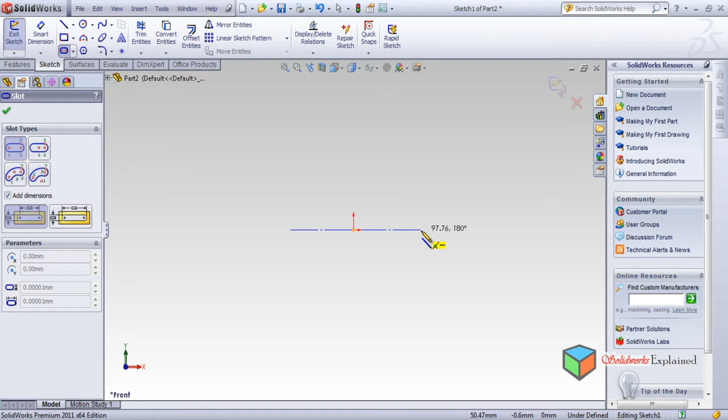Let's start with a new part and start making gears. But before making gears, let's see what I'm doing. Front, normal, sketch, okay, slot, let's say, okay, this big, and here, circle.

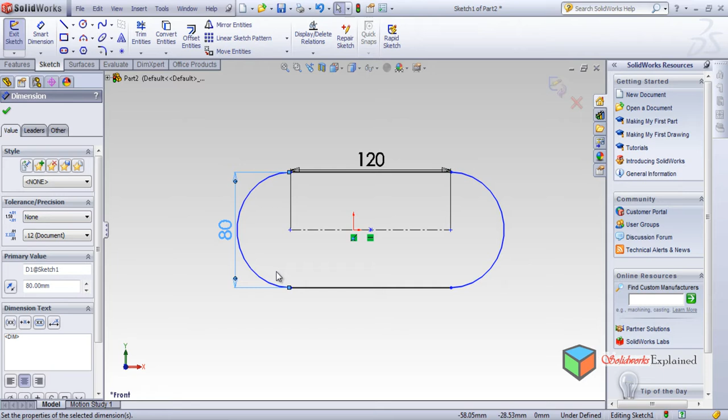How big you want this is important in this case. So for that, how big it should be, I'll make it let's say 100 or more than that, 120, and this I'll make it 80. This distance is 80. Okay, done. Now from here...

Make a circle of radius 20. This 50, no, I don't want 50, I want 20. Okay, we have made a circle with 20. Again the same thing, I'll make it 20. Okay, this is done. Features, extrude 10, okay, or say 20. Okay.

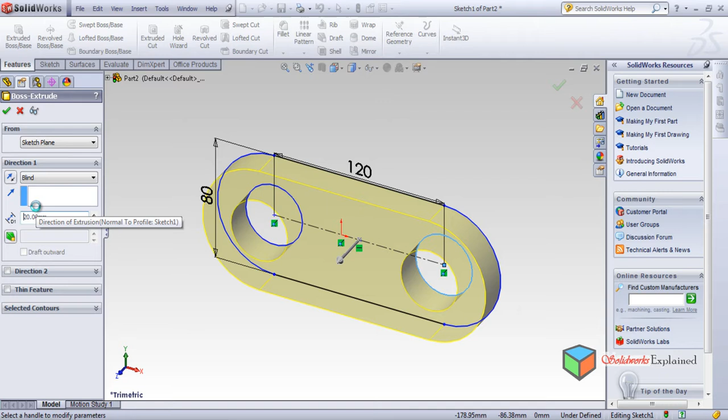This is done. Now what I'll be doing is I will save this part because we'll need this part later. So file, save as, I will make a new folder over here and new folder name will be gear mate. Okay, and the part name of this, let's say, it's a kind of holder.

Save. Now here I will make a rod. There will be a rod, on that rod the gear will be mounted. So I will now make a rod. So close this thing, again make a new part. That was 20, so I need to make a rod.

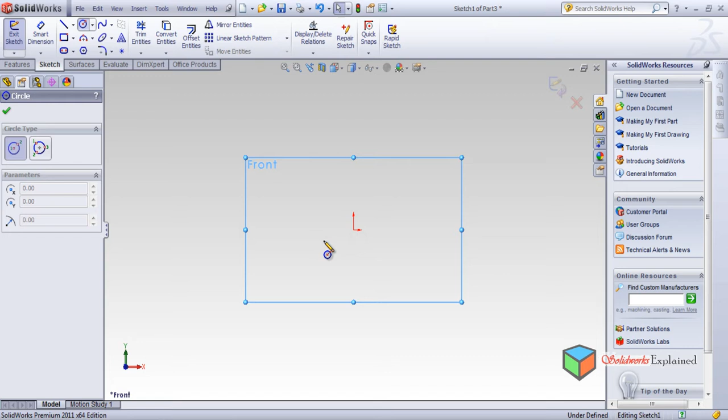But yes, I'll make a rod of 20. So this circle will be of 20, and then features, extrude, will make it not 10, 100 or more than 100, 150. Yes, okay. Now that rod passes to the center of this slot. Yes, definitely it passes to the center of the slot, and what it does is the gear will be mounted. So gear will be mounted somewhere here.

So for that what I need to do is make a plane. This was made in front plane, so I'll go to reference geometry, plane. I have shown you all these things, so I will make this thing quickly, and it will be where you want the plane, where you want the gear. I want my gear somewhere here. Okay, and in this plane make it normal, and I will start a sketch on this.

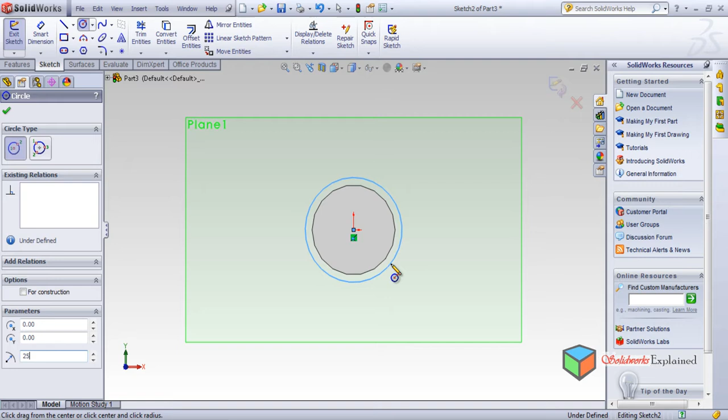Okay, and the sketch will be, say, circle. This was 20, so let's say this will be 25, not very big. Okay, and then I want a center line.

Okay, escape, and then I'll make a key slot, a small key slot, zoom in somewhere here very randomly. Oh, it went somewhere else. Close, line, zoom in. Yes, like this, like this. Escape.

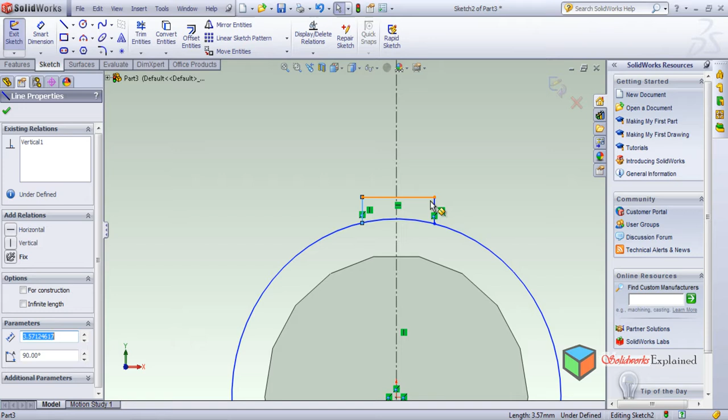Now click here, add relation, make it equal. Okay, this is equal now. Yes, and then smart dimensions, we'll give some dimension 3.5, let's say we'll give it 2. 2 is a bit small, but that's okay, we'll give it 3.

And this dimension is 10. Okay, if this is 10, I don't want it 10 actually, I want it 7 or 6, this much. This is 6 and make it 2 actually, 6 and 2, this will work. Okay, now we'll go to option, sketch, edit, and then trim. We'll trim this thing. If you understand what is this.

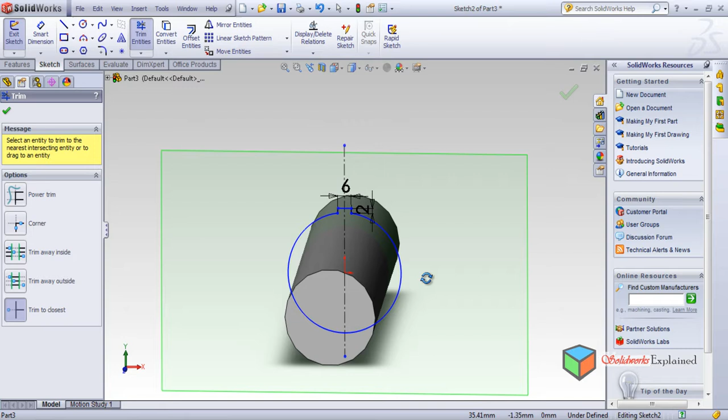Now features, no, not 150, just 20. 20 is more than enough actually. 20, or say just 15. 10 also works. Okay, fine, my rod is ready.

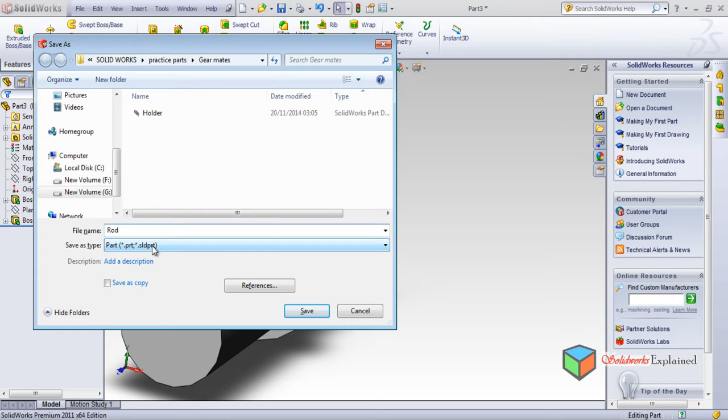Plane, I will hide it. Okay, I'll save this part again, Control S, and then this will be my rod. Save. Okay, I have made the rod.

Now this is the key slot. On this thing my gear will be mounted. So this is 25. I'll close this thing, and again I will open a new part, and I will quickly start making a gear, a simple gear, not very complicated and not using the engineering techniques. Here, circle, and this will be 25.

Okay, if this is 25, then the main gear will be one more circle. This will be, let's say, 80 radius. Yeah, 80 radius. Okay, now we'll make some feature, but before making a feature I want to make

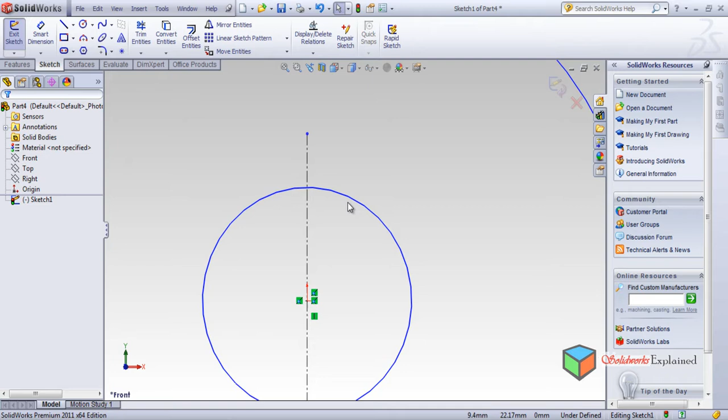a keyhole over here, which fits in that part. So for that again I need a center line. This is the center line, escape, then line, and with this line again same what we did earlier, I'll repeat it like this. If you remember what was the size, this and this should be equal. Okay, and this was, if you remember, 4, and this was, if you remember, 2.

Yeah, and trim. So what is going to happen is that rod will fit over here. Okay, and then features, and then this is a gear, so extrude gear, I want it 20, this big.

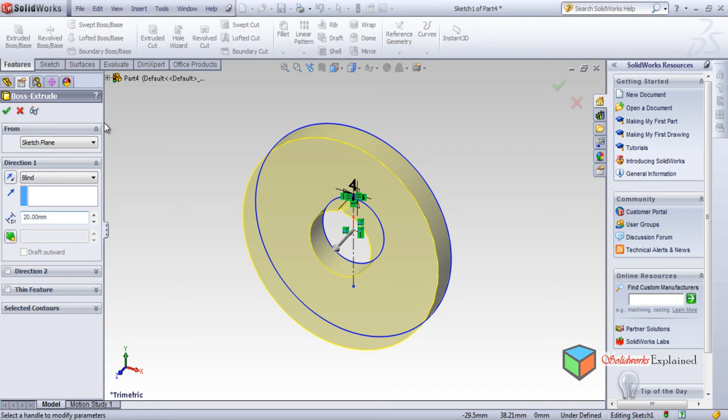Okay, now this thing is done. Now what we'll do is we'll make it normal, and here on this face we'll start making another sketch over here somewhere, and the sketch can be like this. We'll close this profile, and then features, extrude cut.

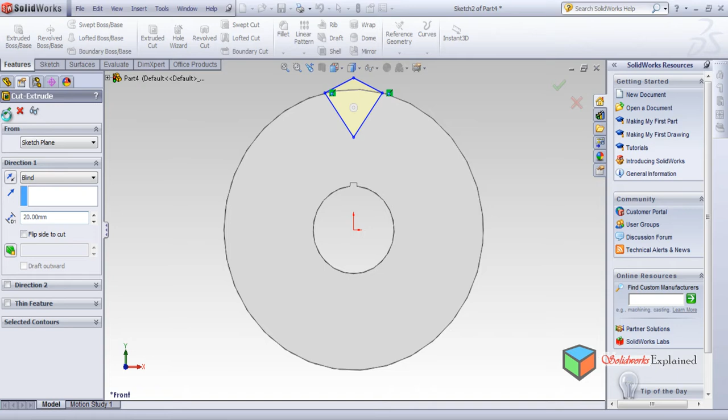Okay, this thing goes off and this thing goes off. What we'll do is we'll start making a circular pattern, and this is this thing. Look, 15 degrees.

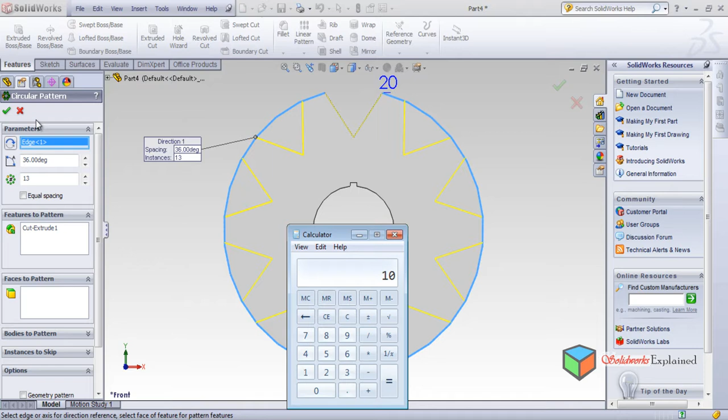I don't want 15. Let's say I want 30 degrees or 36 degrees. If you remember the calculations, 360 divided by degrees, so 36 will be 10, so only 10 will be accommodated here in 36 degrees, so we'll make it 10. But is it okay? Yes, it looks okay with 10. The gear, make it okay.

Cut extrude. Yes, my gear is ready with the key slot. So here I will save the gear, Control S. This is okay. I will make the name of the gear spur gear. This is a bigger gear, spur. Save. Now close this thing.

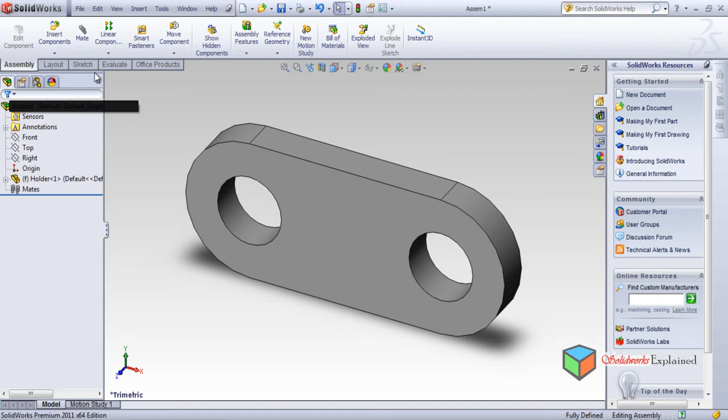Now quickly I'll start with the assembly, so in order to understand how you are working, to make this parts assemble together, go to assembly. Okay, and then what to do? Browse. First thing is the holder. Open. Yes, somewhere here. Again, insert components and browse.

The rod. Open. It should go here somewhere, so we'll keep it here. And then what I'll be doing is, now both the parts can move, but what I'll do is click here, or let's say I want to view some temporary axis. View temporary axis. Okay, this axis mate with this axis. Look, and this is in line.

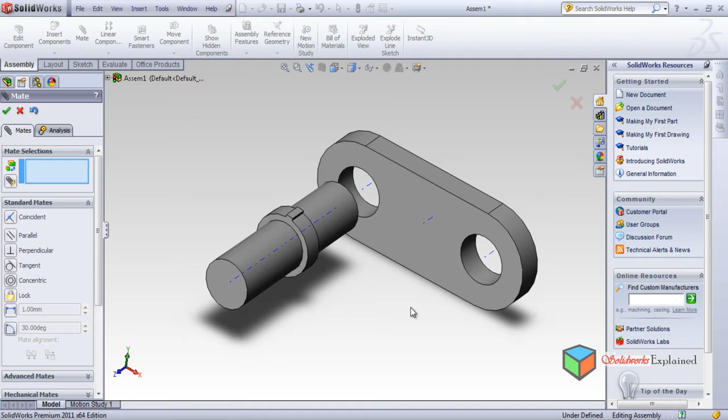Okay, so now coincident. Okay, now look, this is moving like this, but it is not moving anywhere. Okay, again I will teach you the assembly now. So the thing is, this part is moving like this, plus this part is also, look, the key like this, it is moving. So it is having 2 degrees of freedom. One will be X and Y, other will be the rotation.

So now here what I need to do is, not this face, I will select this face and this face, 2 faces, mates, coincident. Okay, now let's see what will happen is, now after making coincident, look, it is having only 1 degree of freedom like this. It is not moving anywhere else. Okay, so this thing is a perfect thing.

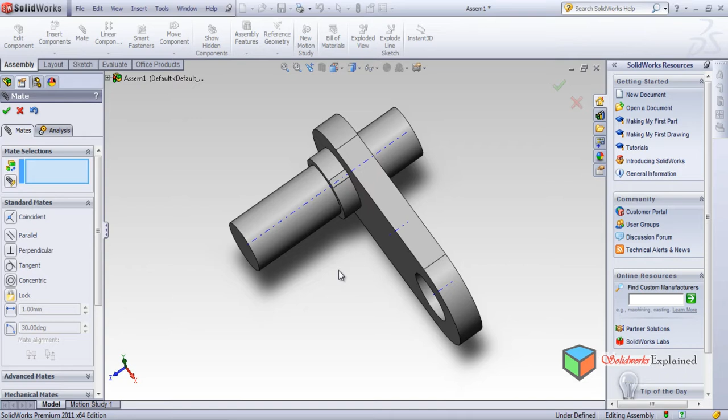And for this thing, I'll close this thing, and what I will do is insert components, browse, and spur gear, double click. Look, I want to make spur gear over here somewhere. Click like this, and then what I need to do is, again I need to do this, I have selected this axis of spur gear, mate with this axis. Okay, now these are coincident. Okay, now I can move this thing, and I can move like this also, anywhere.

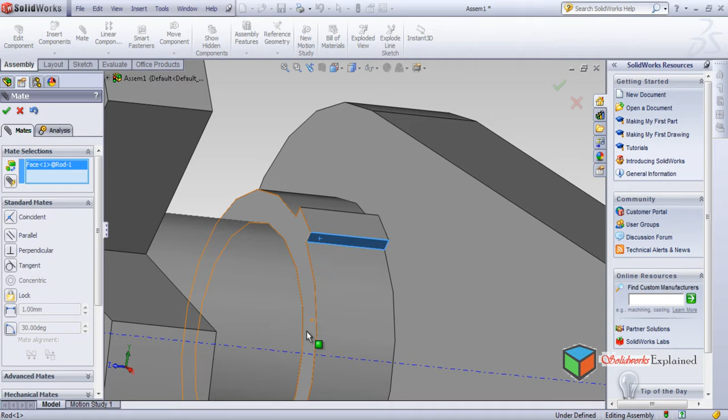So what I'll be doing is, what face should I select to make it coincident one more time? I will select the side face like this, side face, first face, and side face of this. Okay, mate can be created. It shows the mate can't be created. Even if I do okay, please select a mate type. Oh, it shows the type.

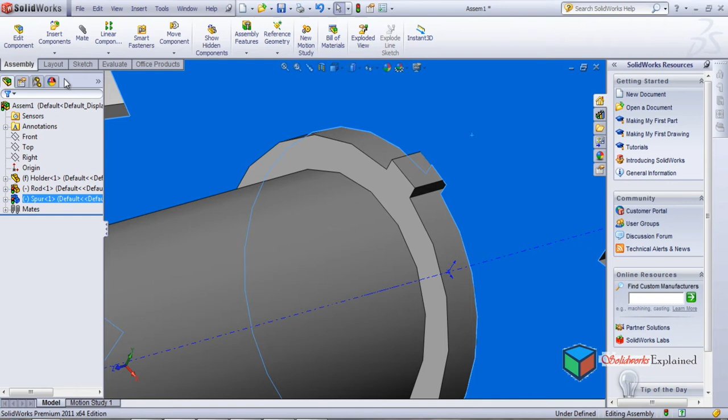Look, the key slot, the size, are the size same? Close this thing, just move inside. Look at this, this size, look, this seems to be a bit smaller. The key slot is much bigger. So where's the problem? The problem is with the gear. This slot is a bit smaller, I guess, or else this is big. We'll see the dimensions, the smart dimensions. This is 6, look, and this, okay, this is 6.

Cancel, delete. And how much is this? This is 4. We wanted 4, but this is 6. So in this case, this rod should be made new.

So what we do is, we'll open this rod. Yes, now this rod is open in a new window. What we do is, go to sketch, make it normal, and then edit sketch.

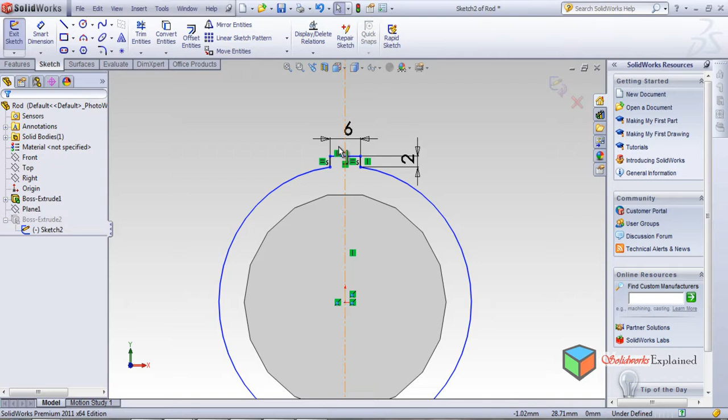Look, why is this 6? This created a problem, this should be 4. Exit sketch when this is made, isometric view, we'll save it. Control S.

Is done. Now we'll go back to our assembly. This is our assembly here. Yes, make it yes. Okay, now we'll move and see. Yes, it seems to be alright.

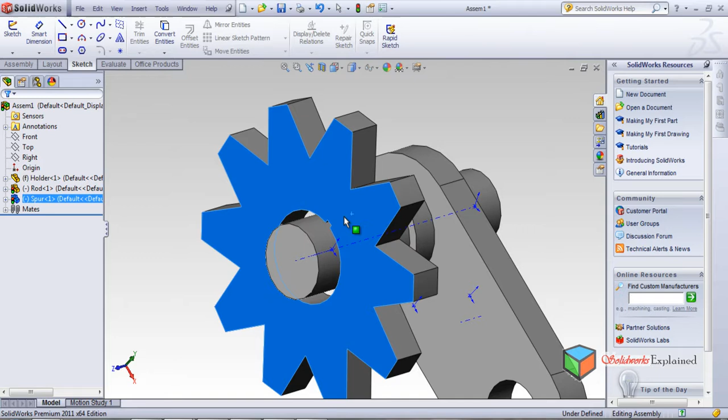Now we'll see whether this is moving. Yes, this is moving, and this is also moving. Okay, this is perfect. Now in this case, what we need to do is again the same thing.

Select this edge, and this should mate with what? Mate with this edge. Okay.

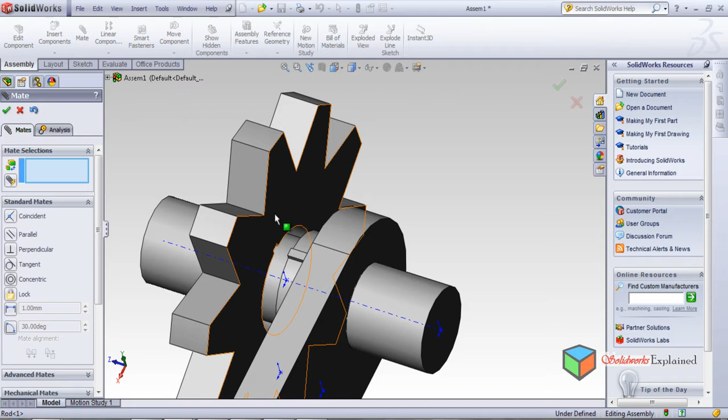Zoom in. Coincident, yes. Now look, when this moves, this also moves, but again still this movement is not restricted. So to restrict this particular movement, what we need to do is click here, mate with this surface. Okay, coincident, yes. Now see what happens, look, this moves.

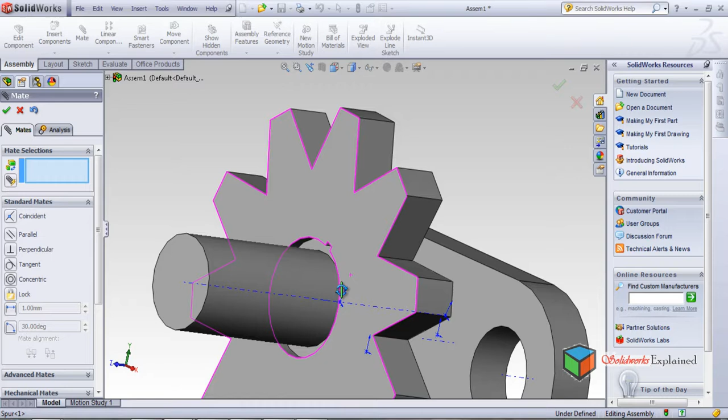We'll zoom it, this also moves. What we find is the thickness of the spur gear is a bit higher than the slot on the rod. So what you can see is, like, look, this is very high thickness.

So I think I need to reduce this thickness. For that I need to measure this rod thickness. How much is this thickness? So this is the boss extrude edit feature, and it was made 15.

Close this thing. We'll open the gear, spur gear, and let's see, cut extrude, boss extrude. This is the boss extrude edit feature. This is 20, so we'll make it 15. Okay.

So now this is 15 and we'll save it. Control S. Okay, this is done, and now go back to assembly and we'll make it. This is assembly. Look, it has been automatically updated and now it looks good. It fits properly, it moves properly. So this thing is done.

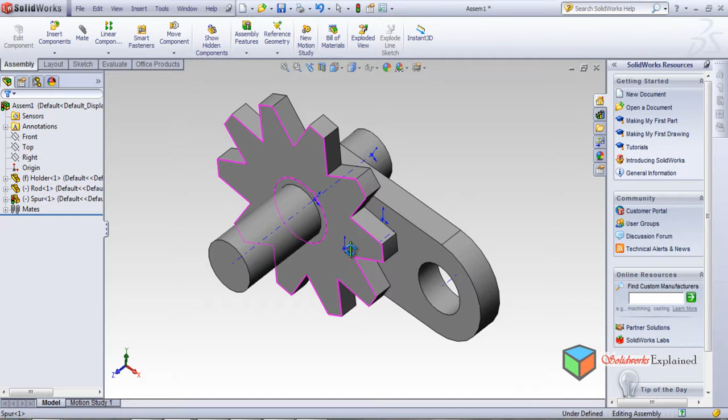So till now many things are done. Now I need a small gear, a small gear which can rotate. I want a rod also here, so I'll insert one more rod.

Insert rod over here. We'll do the same thing. Click here, mate, click here. This thing is done. Now coincident, click here, zoom in a little bit, click here. This is coincident, yes. Zoom out.

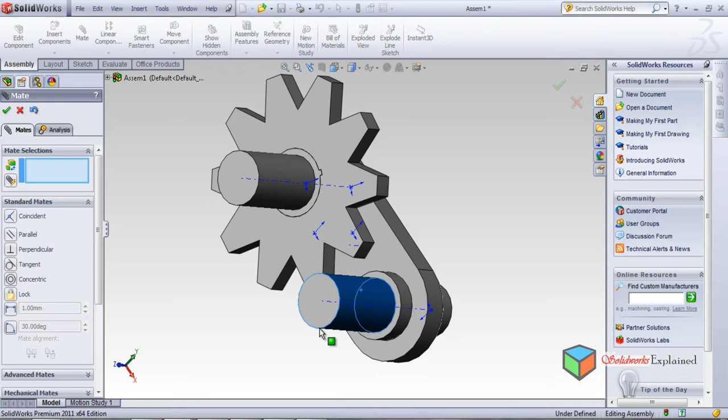Okay, now zoom in a little bit and check. Yes, this moves. This doesn't come out, then this moves. So this is proper. So what we'll do is we'll save this assembly so that we do not lose our data.

File, save as. Okay, and we'll save here as assembly 1. Save. So this thing is being saved now, and I think this is very close, so I think we need to increase the distance between two gears.

Now what I need to do is I want to make one more gear. So for that I'll go back to the earlier gear and let's see whether I can modify this gear or not. Okay, so this is boss extrude and this is the sketch of it.

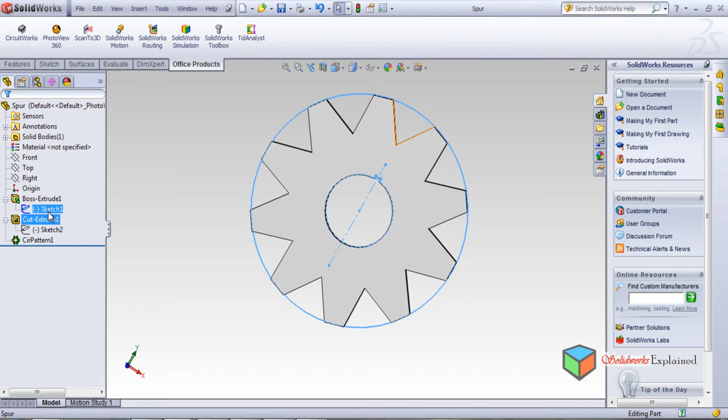This is the sketch and this is a cut extrude. So I think I need to modify the cut extrude because, so let's go to cut extrude sketch, edit sketch. This is a sketch, but I want to reduce the size, anyway I can do that thing.

This is a bit bigger, and this angle is a bit smaller. This is smaller. Let's see, but the problem is, so I want a smaller gear with a smaller diameter, so do it back and look how the shape has been changed.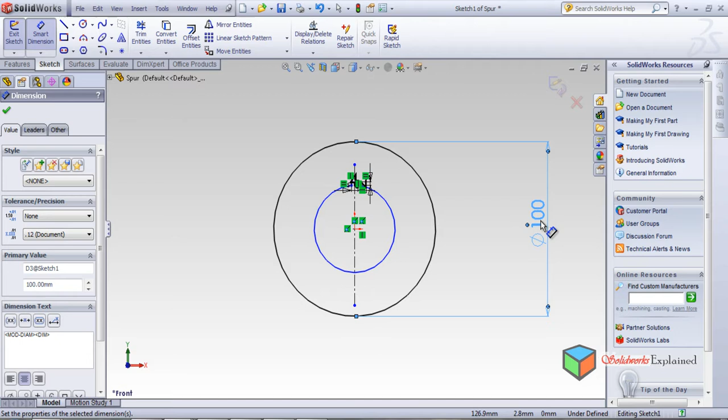But this is the original sketch, so I will go to original sketch. Okay, we'll make it normal, and this with smart dimensions is 160. I don't want it 160, I want it 100 only.

Make it back and see how are the gears. So this boss extrude is proper, and the cut extrude, go to sketch and don't do it like this, make it a little bit bigger and then go back. Look how these things are changing.

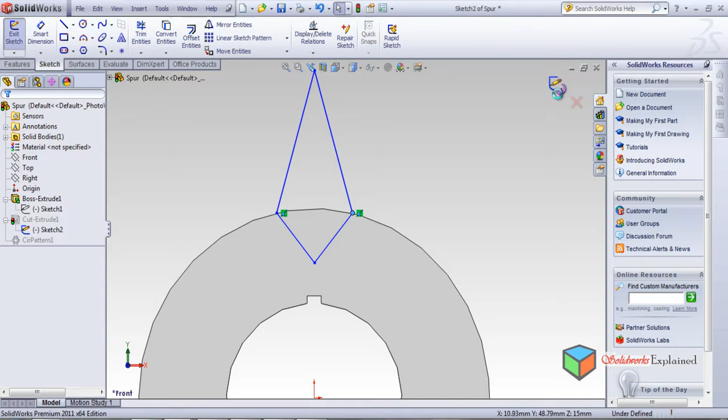Again go to sketch, check what can be done. This can be moved over here, this can be a little bit here, and this is a little bit here, only a little bit like this. Now see how a small gear is made.

So I will save this. And I need to save this file, save as. Okay, and then we'll make it pinion, P-I-N-I-O-N. Save. So the pinion is made.

Now assembly, this is assembly, go to assembly, and here's what I need to do. But in my pinion gear I need to make some modifications because I cannot keep it like this.

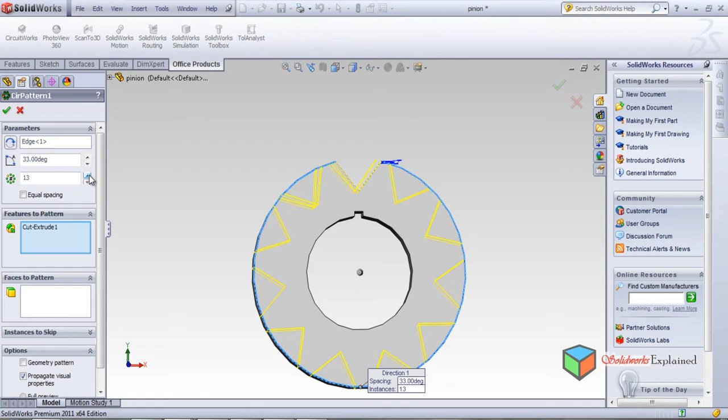So let's see in circular pattern what kind of modifications I can make. With 33 I want it more number, 22, I'll make it less. Look, yes, more number of teeth, can you see?

23, I'll make it 24 teeth. So we'll do the calculation, 360 divided by 24, so I need to make 15 degrees for 24 angle. It should be 15 degrees for 24, but it will cut everything because the gear is very small.

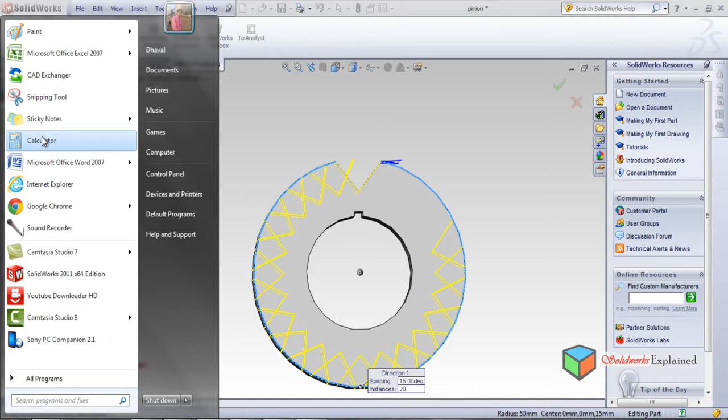So I'll make it, let's say, not 24 but at least 20. So it should be 360 divided by 20, which is 18. So I need to make it 18 numbers, 18 degrees.

Is this okay? Well, I feel this is okay, but let's check. Look, this seems to be fine. So Control S, okay, this saving work is done.

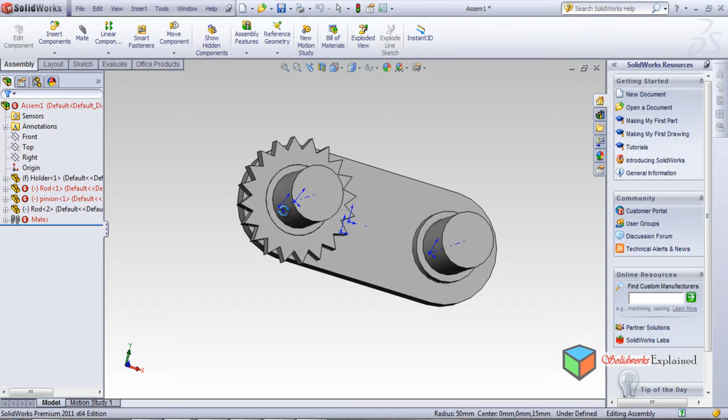Now go to assembly. It shows error. Close. Because the same gear has been modified, that's why it shows error.

So we'll do Control Z. Let's see whether this works. No, go back to the gear. Yes, this is the gear. Now again we'll go to assembly.

So this is how this gear is changing. It has created really a lot of problems. Control Z, Control Z, everything is Control Z over here. Now go back to assembly.

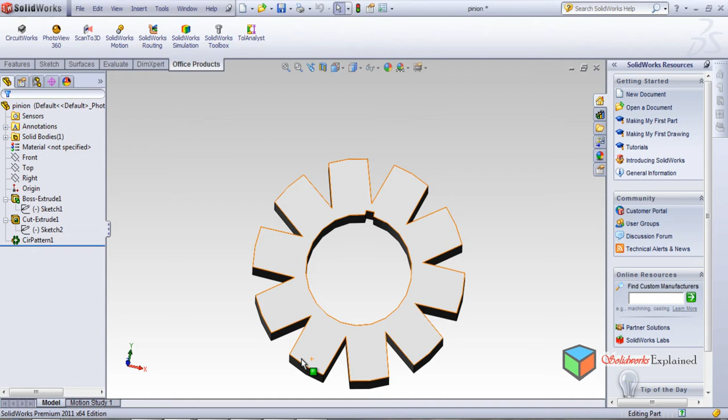In assembly this thing changes. I don't want this to change. Come back in pinion. Control Z, Control Z, Control Z, Control Z. Look, very bad. Control Z, Control Z.

This is our original gear. Oh yeah, look, this is my original gear. Assembly. And yeah, now what I need to do is,

Here I will file, save as, and it shows some error. Read this thing: being referenced by. It shows you need to do a save as copy in the save as dialog box if you wish to maintain existing reference. Close.

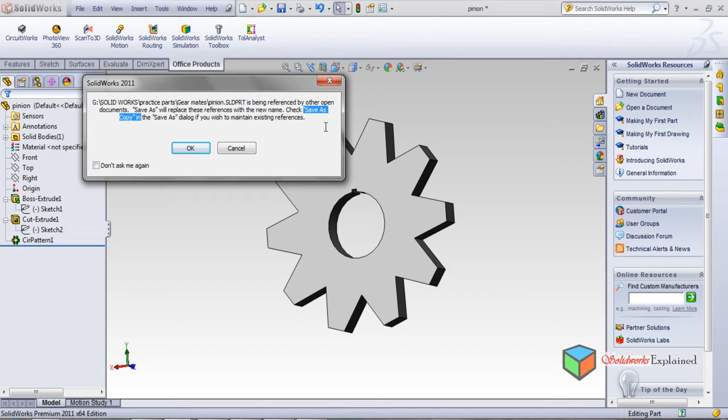Save as copy. I cannot find save as copy, so not to worry much.

Just the thing is, go to sketch. I need to know what are the dimensions. This is radius 25. Close. This is 160. Okay, so close this thing and close this thing.

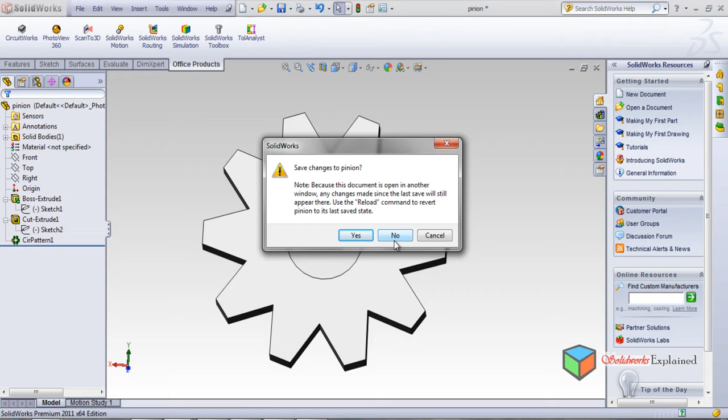If I say no, this thing remains the same, and I'll make a new part. Go to front plane,

Quickly make a circle, again make a circle, and then I need to make, so smart dimensions.

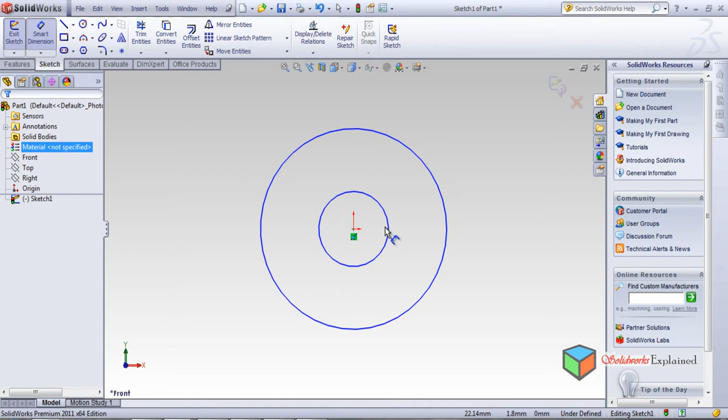Click here, this should be 25. Okay, and then I'll sketch something, but this is gear, so in gear this is 25. I know, cancel it,

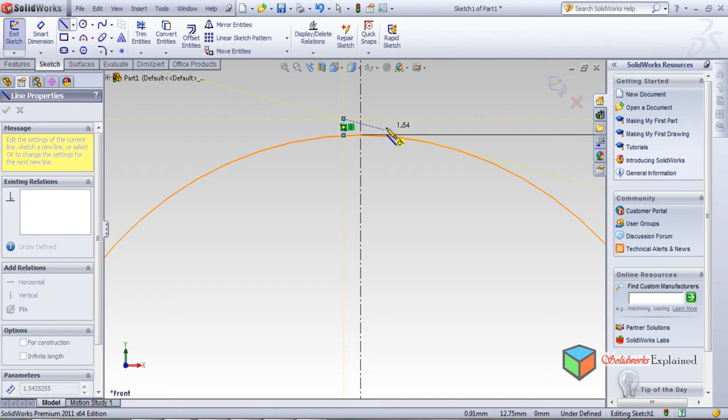And I need a center line. And line. Escape.

Same like before. This and this line should be equal. Both of them should be 2.

Smart dimensions should be 2. Seems to be very big. And this line should be 4.

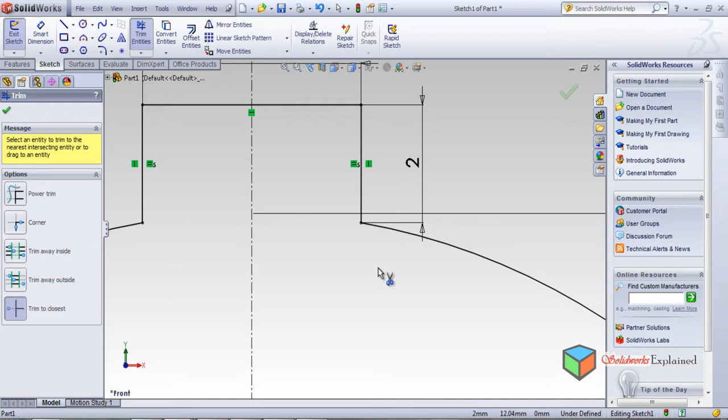Now it's okay. Go to trim this, zoom out. Okay, I don't want it 160, I want it only 100, or say just 80.

Back. And now what I need to do is features, extrude, select this sketch and make it 15.

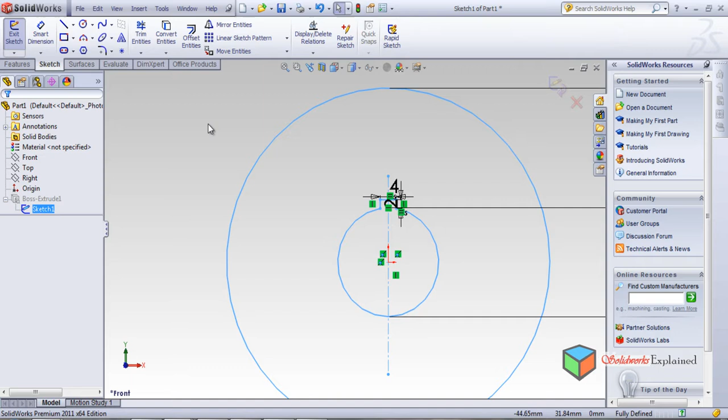Now on this sketch I will do something. What I will do, but I don't want to do anything on sketch, I want to do in the feature only. So sketch, and then from here,

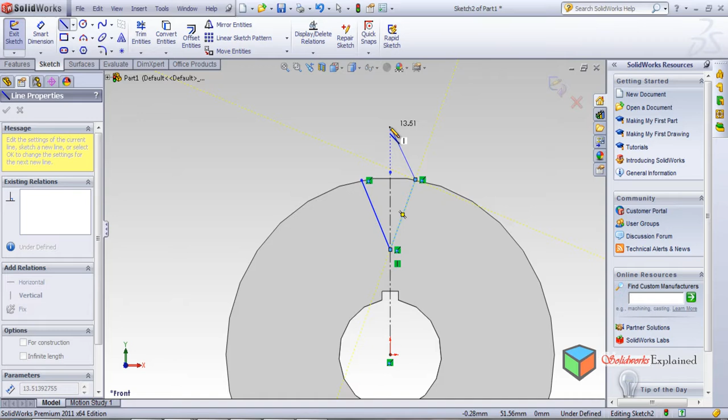So first I'll try to make a center line. Center line is done, and we'll sketch something. And then feature the extrude cut.

Okay, now circular pattern. This is the edge, and I want more numbers, 16 numbers. Look, so say 24. Is it okay? Yes. Cut extrude. This is done.

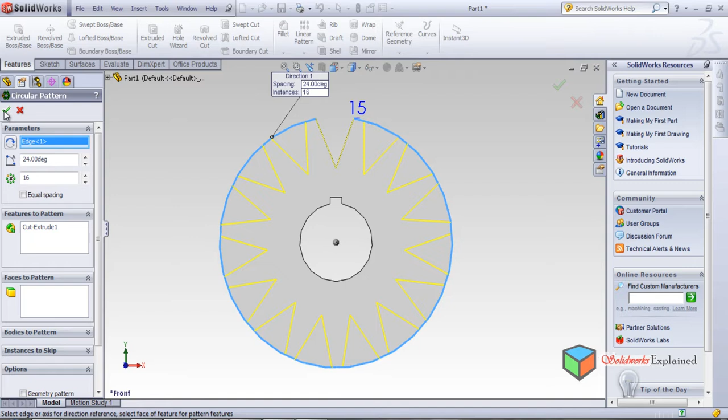Now we'll save this thing as pinion. Save, we'll replace this thing. Okay, that is open, so no problem. I will save it as another name, save as pinion new. Okay, save.

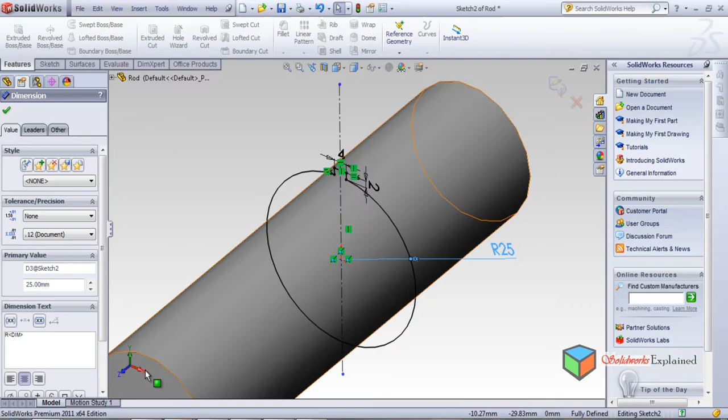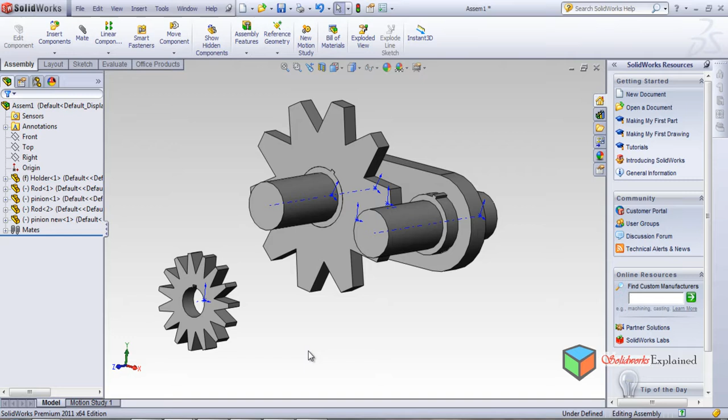Now coming back to assembly, this moves, and now we'll insert the pinion new. Look what has happened - this is very small.

Sketch smart dimensions - I want the dimension of the circle. Cancel. This was radius 12.5, I wanted radius 25. So go back over here, we'll open it - pinion new. Yes, many a times this thing happens, so don't worry.

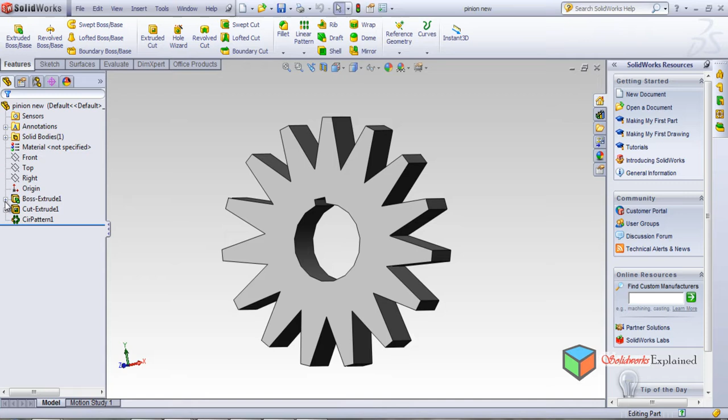We'll go to the sketch. This is diameter 50, and this will be 100. Zoom in, back. Oh, only this has remained.

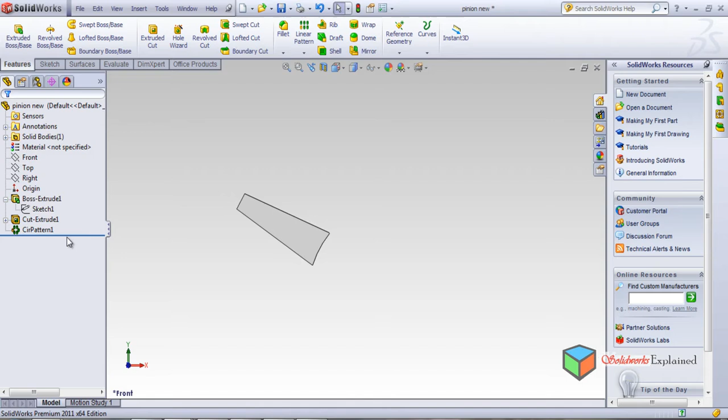What we'll do is we'll suppress this thing for a while. Okay, now cut extrude - we will modify the cut extrude. Back.

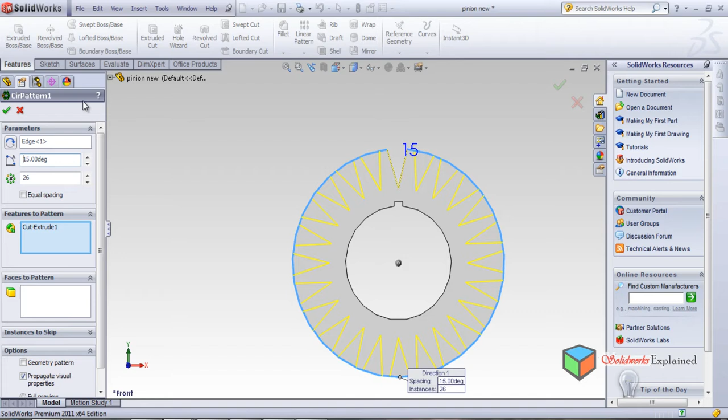Now see in circular pattern what happens - edit feature. Let's have more number, 26, so this should be 15. Yes, this is done. Now go back to assembly.

This time let's see what happens. We'll make it coincident - click here, mate with this. Now what you need to mate is this face. Close this thing.

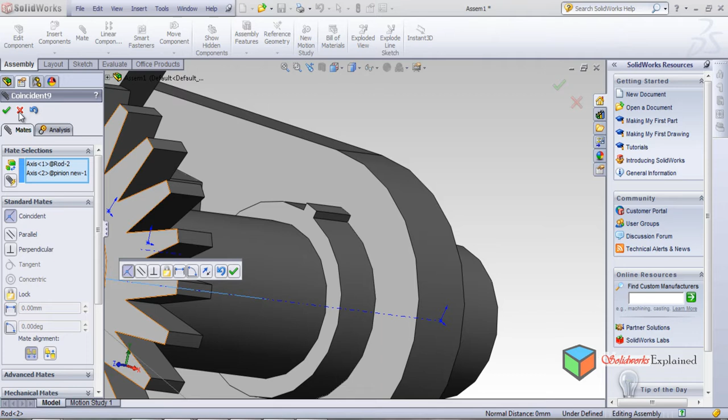Again there was some error. Click here, mate, click here. You need to do OK, coincident OK - this is important. Now click this - face 1 is selected. Click this. Okay, coincident. Okay.

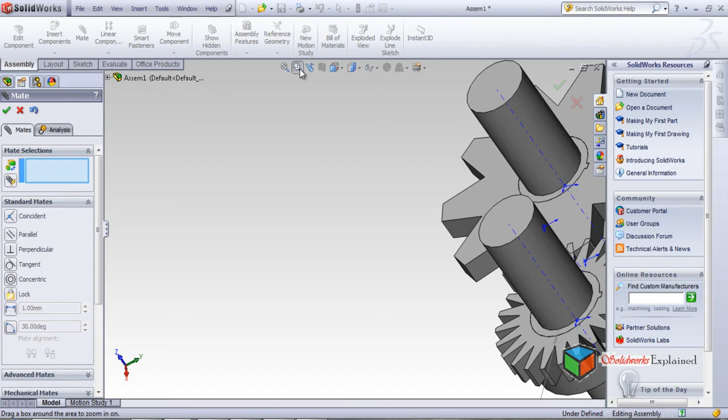Now for going inside, click this, it goes inside. Coincident. Okay, now see, click here. Yeah.

Yes, this also moves, but the thing is there are lot many teeth, so I need to modify these teeth. How I will modify is circular pattern.

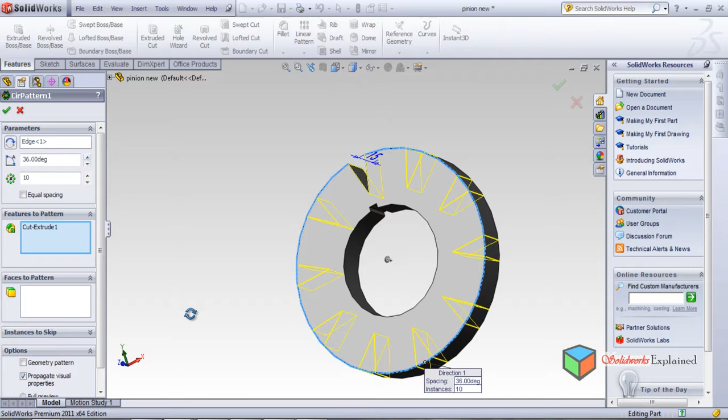Right click - 36, I just want 10. 15, I want it 36. 30. 36. Then 36. This is okay.

But now this looks very bad - not this, back. Cut extrude looks very bad. Zoom in, we'll change the cut extrude points.

Back. Close. Some error. Control Z. Okay, zoom in.

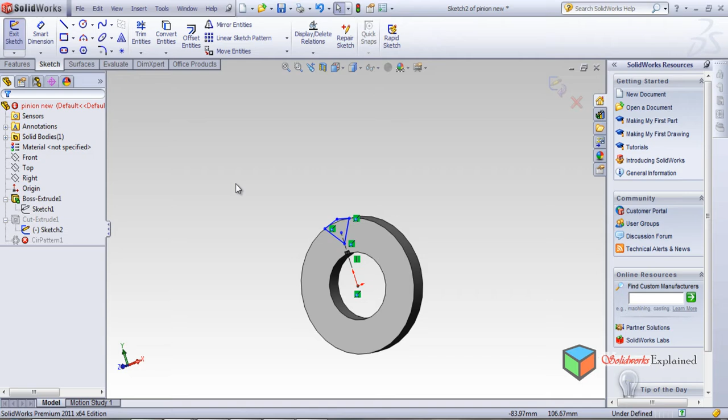Okay, seems to be okay. Go to assembly and see.

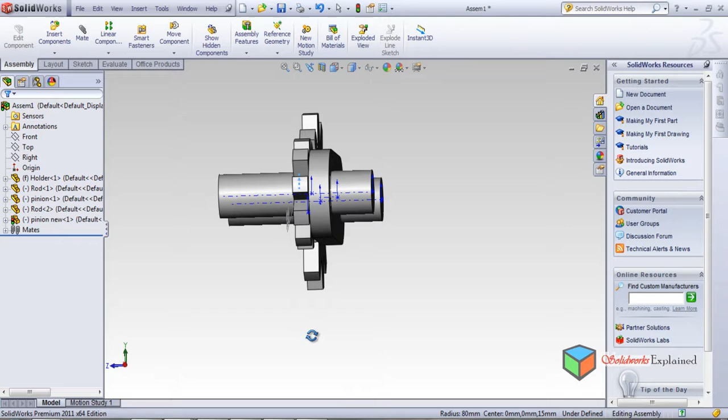The teeth of this gear are very big. Here I need to make - if this moves, this should also move - and there are more number of teeth in this gear, and I think the distance is not a problem, but the problem is with the gears.

So what I need to do is I need to do some kind of change in the gear, some kind of change in the pinion gear is with the sketch, cut extrude sketch, make it normal.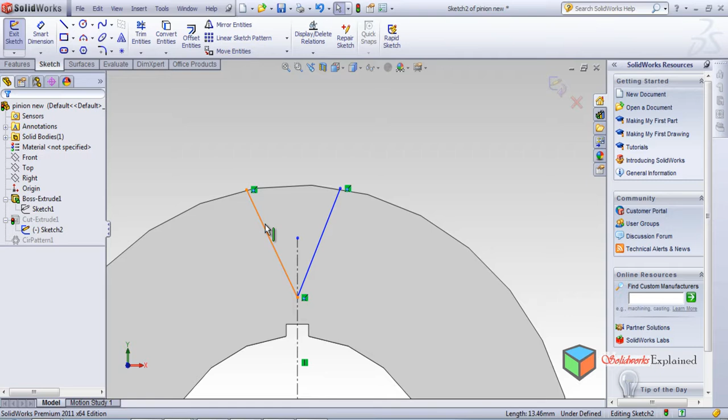Okay, here will be the change - what do you say - the change will be to delete this line, this delete, this delete. I'll make it proper.

Like this. Okay. And then from here a little bit inside and back.

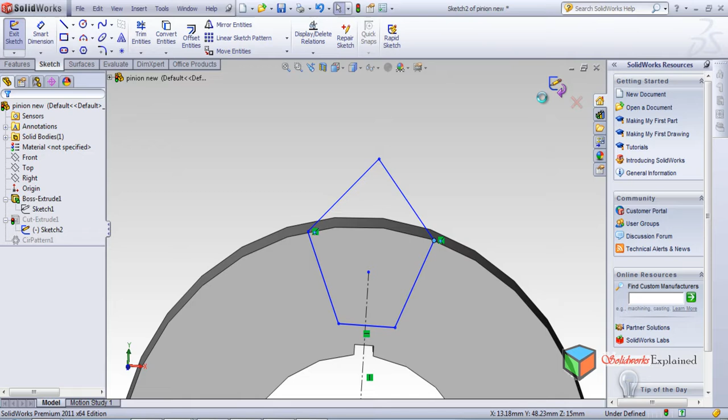Look what has happened - this is the worst thing that has happened ever in the complete life of my designing. Make it back - the same thing is happening. I don't know why. It should never ever happen. Never ever.

So here I will delete this circular pattern first, and now I'll again make a circular pattern with this profile. So features to pattern is the extrude cut, the parameter is this line, and equal spacing.

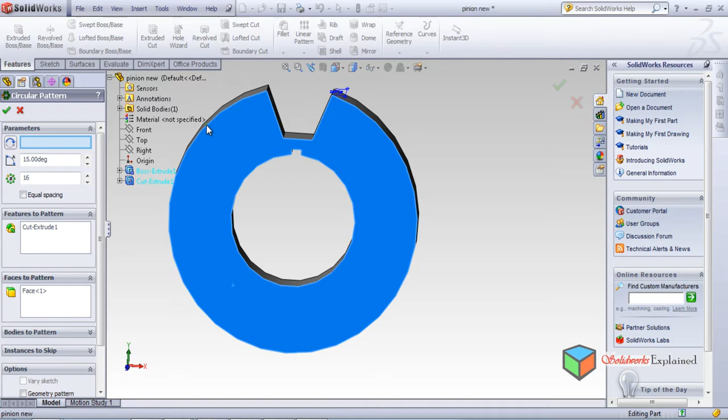Features to pattern is not the boss, delete. Faces to pattern is this face and line is this. And so we'll decrease number - 10, and this will be 36.

Okay, let's see whether this thing works. It shows error, why? Ideally the gear looks very good because it has selected the boss extrude. What has happened?

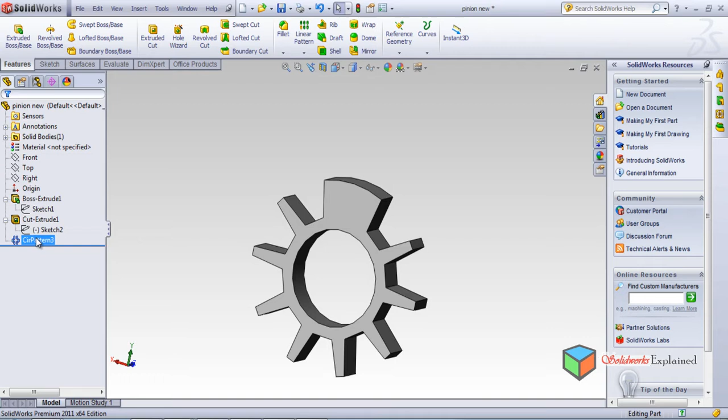Now it's done - very different kind of gear, never seen anywhere. Now go back to assembly. Look, now it fits. Whether this thing moves this thing or not, we'll see.

Once this thing moves, this thing also moves. Okay, both the things are moving.

Now here I think I need to apply the option called gear mates. So what I need to do is I need to select something - select this edge, mate with this edge, and...

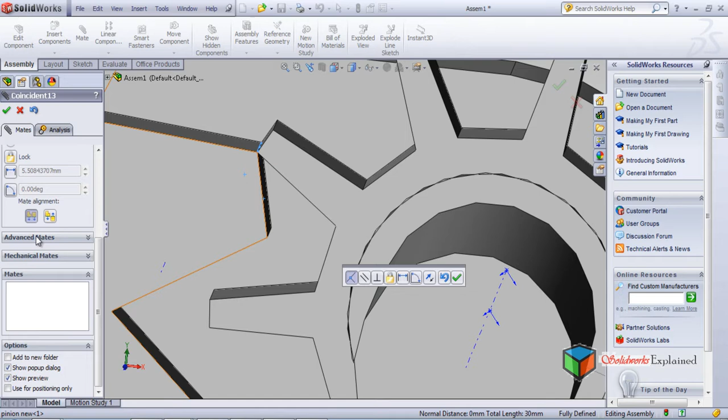Advanced mates - in advanced mates we'll find two things: distance, angle. In mechanical mates we'll find the gear, so we'll click gear mate. In mechanical, let's set the ratio, we'll make it 3, enter. Okay, this is gear mate.

So when you move this, look, this also moves.

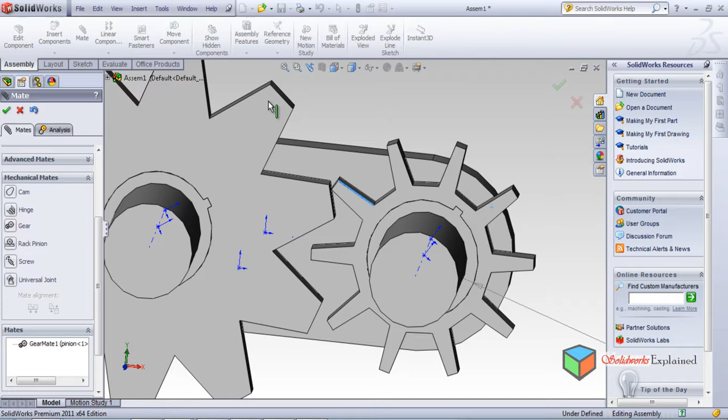You understand how the gear functions? Ideally speaking, this second wheel is not the gear. When you move like this, look, this is moving. When you move like this, this moves. Ideally speaking, this is not the gear, but this is only for your understanding of how the gear mate option works, and you can draw a gear perfectly with proper dimensions, with the pitch, addendum, dedendum, and the mating criteria. But this is how the option gear mate works. I need to show you one more option which is necessary.

Now after the gear has been mated, when I do the motion, this thing moves, but I don't want it like that. I want it to do it automatically. For that I need to use the motion study. If you remember, previously we have done the motion study, but this time I will use these remaining options, and out of these I will use the option motor.

So let's left click on the motor and make it down, and you will find a few options: rotary motor and linear motor. Yes, this is a rotary motor. Okay, come down, it shows a direction, so click here and click on this pinion. It shows this direction. No, I want the other direction, this direction. Okay, come down, it shows speed and everything, which is not of our concern, and we click it right.

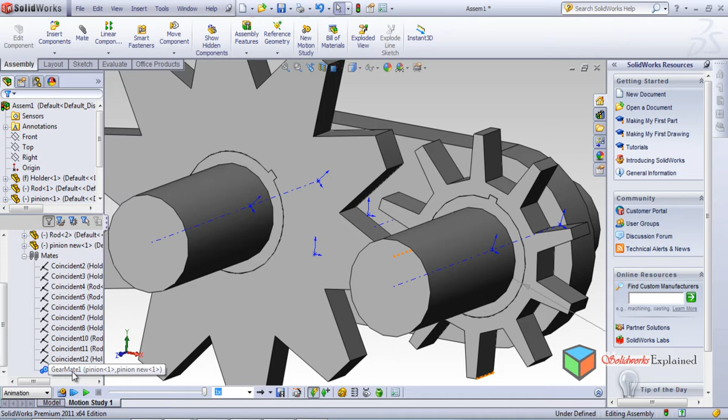So we can go back to the option rotary motor, right click, edit feature, and see what changes we can make. And also we can go back to our gear mate option to change what kind of mating ratio is being used. So I will change some options in gear mate. For gear mate you need to go to mates, open this, and you will find the option gear mate, right click or else double click on it. Pinion one, pinion new, so this should work.

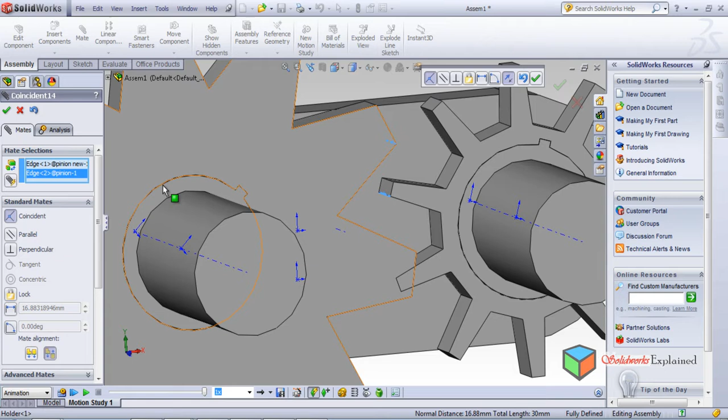Suppress, delete from motion study. Yes, we'll delete from motion study. Yes, again we'll use the same thing, zoom in, and what I'll do is again the same thing, this edge mate with this edge. No, close. Mistake, this edge mate with this edge. Yes. Yes.

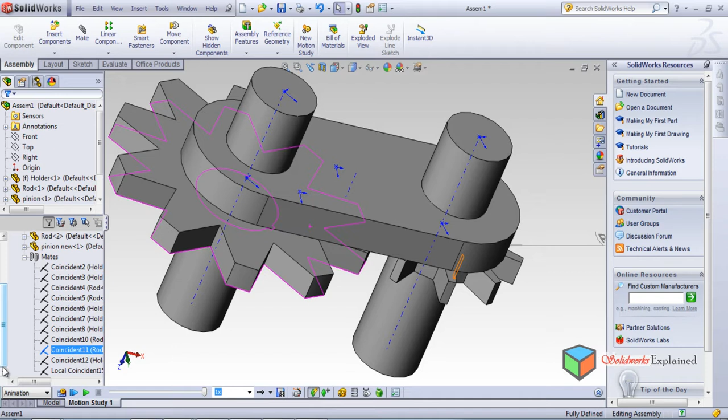But if I go to mechanical mates and see the gear mates, reverse, close this thing. So in short, my thing was like this: the gear should move in any condition, even if you're doing motion study or not, this should be done. And look, this is moving. So the option of gear mate has been disabled, that's why.

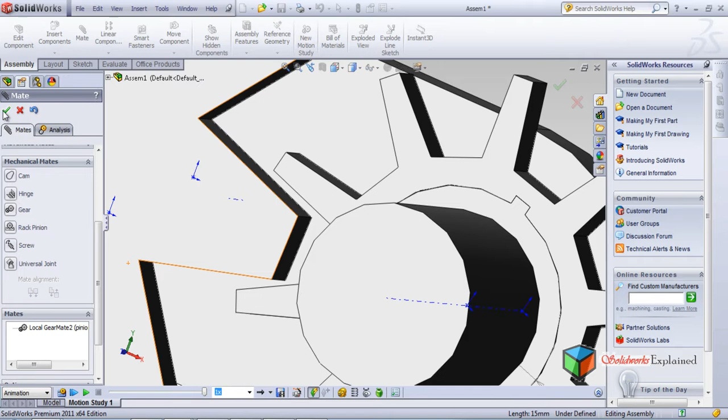This mate with this. Okay, yes, go down, mechanical mates, gear mates ratio, I'll make it 4. Can I? Calculate.

So this is perfect. When this is perfect, now this assembly is done.

Now let's see if your customer wants to know how much work you have done. They don't have SolidWorks, nor do they have any other software to view the parts. For that we need to send them an image. But if you just directly go to print screen and copy the complete screen, you will find these options, where the options are made, and you will see the tree and everything, which looks bad. So you need to send only the image.

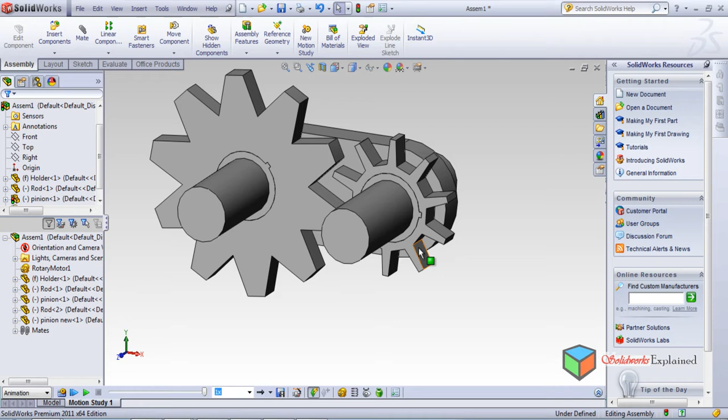So for that you need to go to view. I don't want to show origins. Okay, I also don't want to show view temporary axes. Now this looks a bit bad. Good, this delete. Okay, first of all I will save this. Control S, save all. Okay, this is saved now.

After saving this, you need to capture the image. So for that, file, save as, not assembly, this is image, and here open this. Once you open this, you'll find many options, it can be saved as PDF, jpeg, or TIFF. For now we'll save in jpeg. So this is jpeg, save.

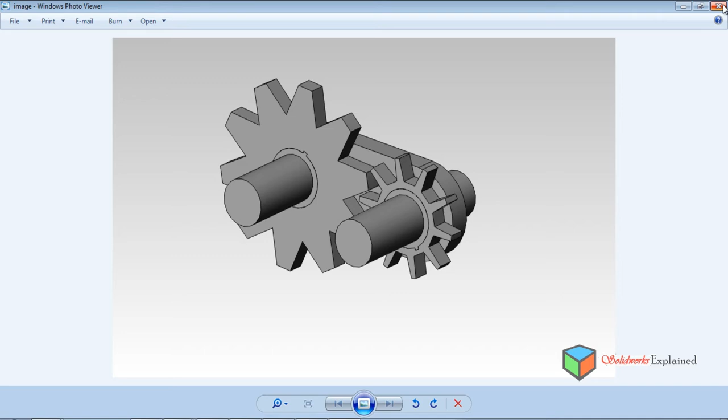Once this is saved, we'll go to the image. Look how beautiful the image looks. Nothing, very simple. Yes, close. Oh yeah, this is how we use the option GearMate along with the option to save it as an image, and the simulation between the two gears. Thank you.